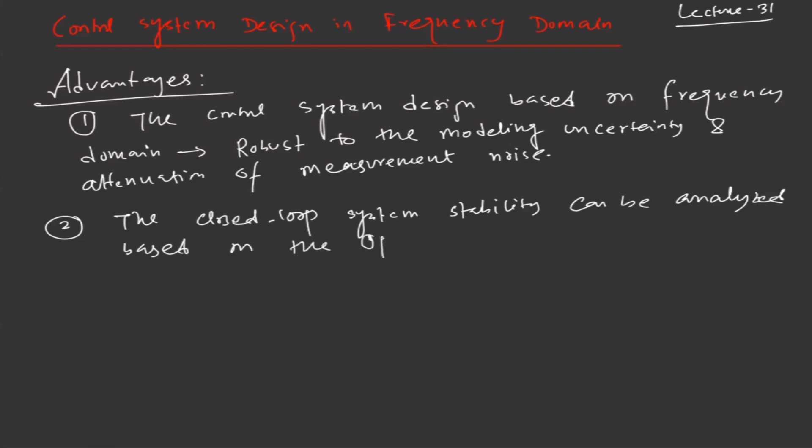So the control system based on frequency domain analysis can deal with modeling uncertainty and measurement noise. Second advantage: the closed loop system stability can be analyzed based on the open loop frequency response.

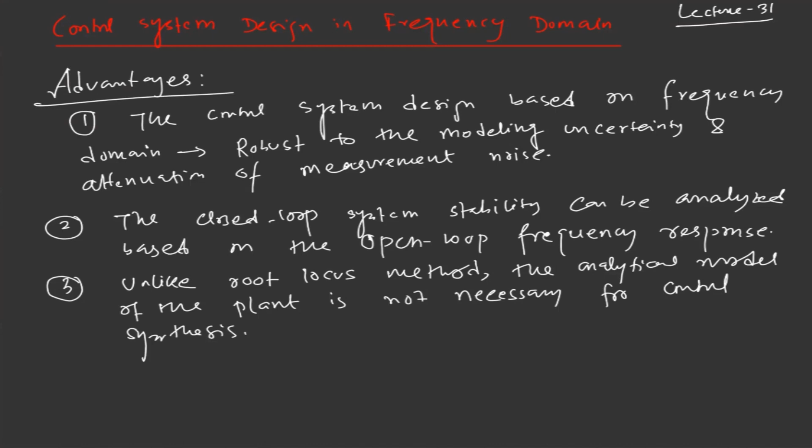Third point is, unlike the root locus method, the analytical model of the plant is not necessary for control synthesis. If you notice in the previous lectures, to design the PID control, the analytical model of the plant needs to be known. But in the frequency domain, it is not necessary.

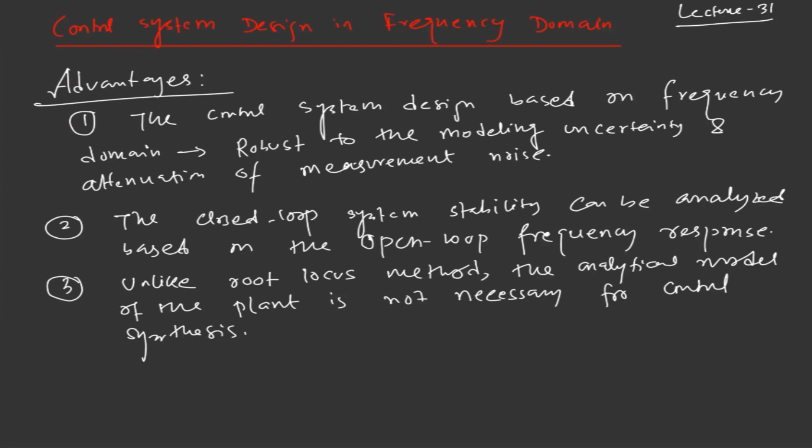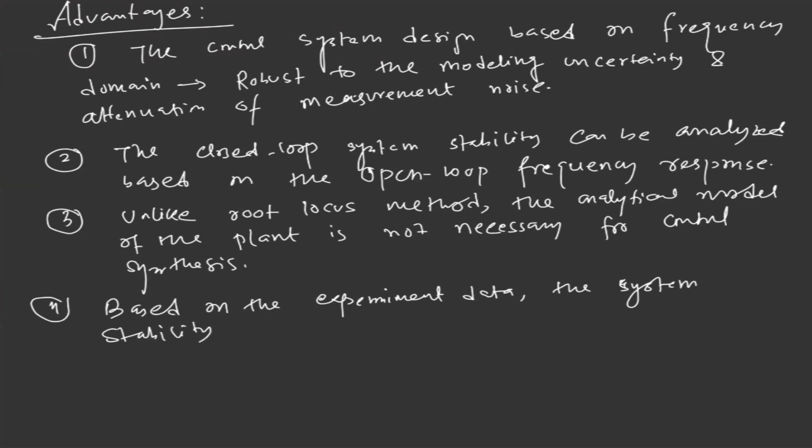Based on the experimental data or frequency response of the system, we can come up with the control system design. So we can write: based on experimental data, system stability can be analyzed.

And also, why this is important: because in most cases, the suppliers may not provide the detailed analytical model of the system. They only provide the data, and from the given data, we can come up with the control system analysis.

So for aircraft attitude control, suppliers may not provide a detailed analytical model of the different subsystems for designing the control system. This kind of problem can be dealt with in frequency domain analysis. Even when the analytical model is not available to us, we can come up with the control system stability.

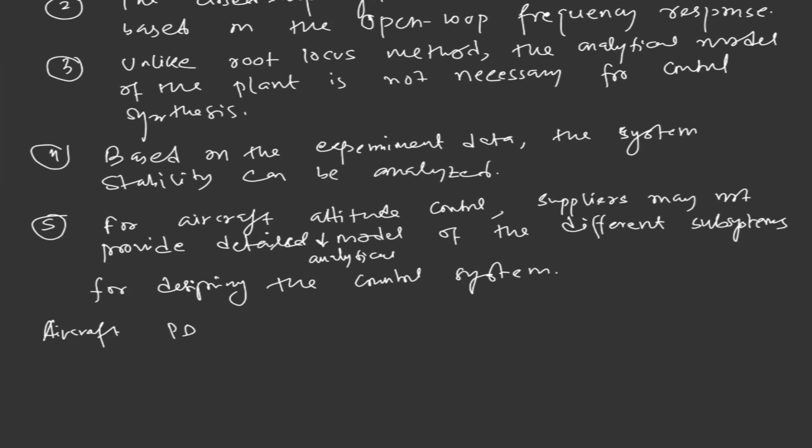So these are the few advantages in frequency domain analysis. Now let's go back to our aircraft PD control system, the aircraft PD controlled attitude problem. Here we'll come up with some relations, how we can derive some quality conditions based on the frequency domain measurements as well as time domain analysis, and based on these relations, we can come up with the control system design. So first, let's go with the PD control system for the aircraft attitude control problem.

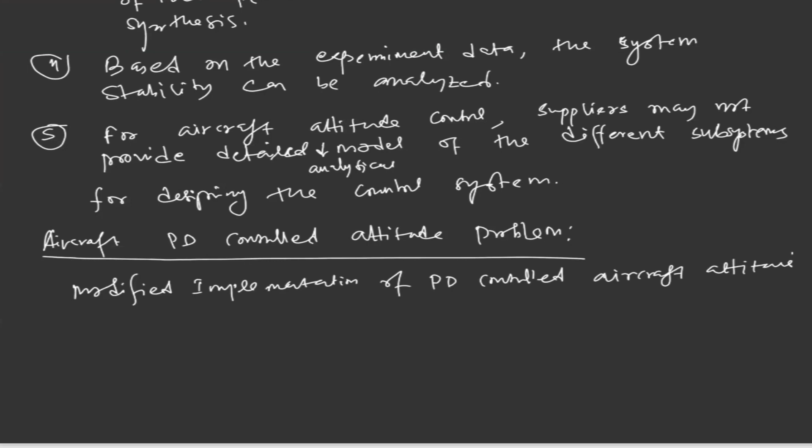So there are two different models we have discussed, if you remember. One was the modified implementation of the PD controlled aircraft attitude problem.

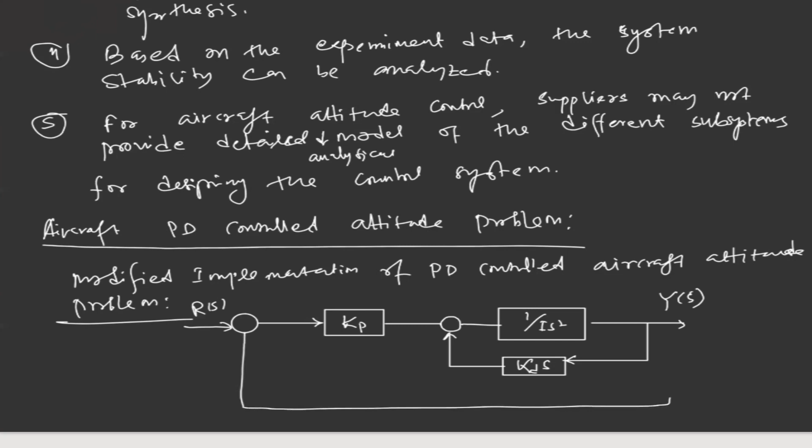So the block diagram we had, in the forward path we had KP, and here we have another summing point, and this is our plant, which is 1 upon IS square, and in the feedback we had KD S, this is our output which was generated by YS. This is the feedback, and we have a summing point which basically connects the negative feedback, and this is our reference signal R to be tracked, and this is the negative feedback. This is actually the modified implementation of the PD control system of the aircraft attitude problem.

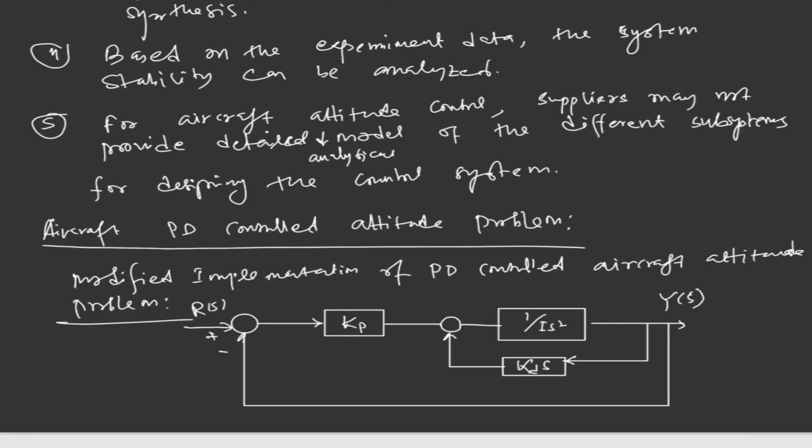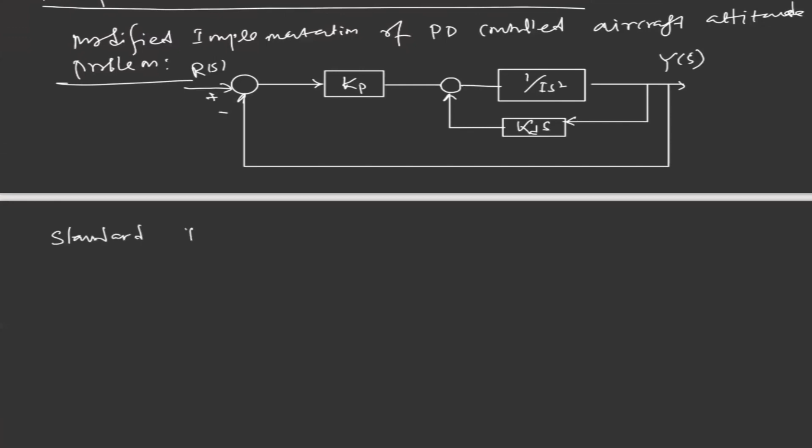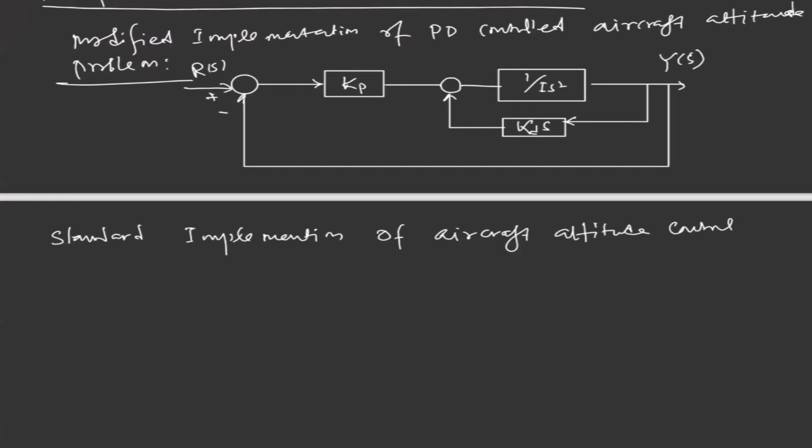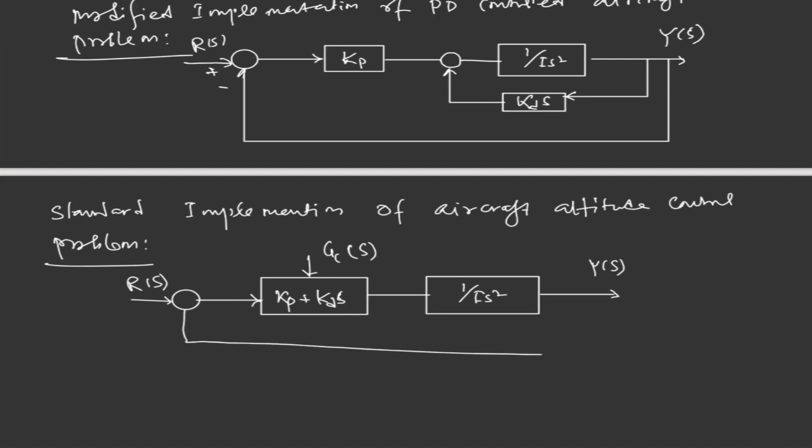And we have the standard implementation as well. If you look at the PD control system, the standard implementation of the aircraft attitude control problem, their block diagram was: this is our PD controller, KP plus KDS, this is basically GC of S, the controller transfer function. And we have the plant, which is 1 upon I S squared, and this is our output Y of S. And this is the summing point which connects the closed loop path. This is R of S to be tracked, and this is our negative feedback.

This is the modified implementation of the aircraft attitude control. We'll take this block diagram to come up with the relation between the frequency domain analysis and time domain analysis. So based on the time domain parameters, we can come up with conclusions on the frequency domain part, and if you have frequency domain specifications, we can come up with the time domain specification. This is a very important relation that we are going to have now.

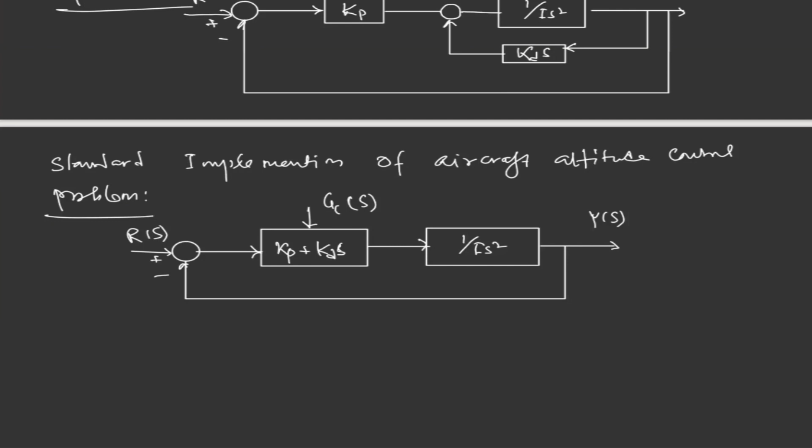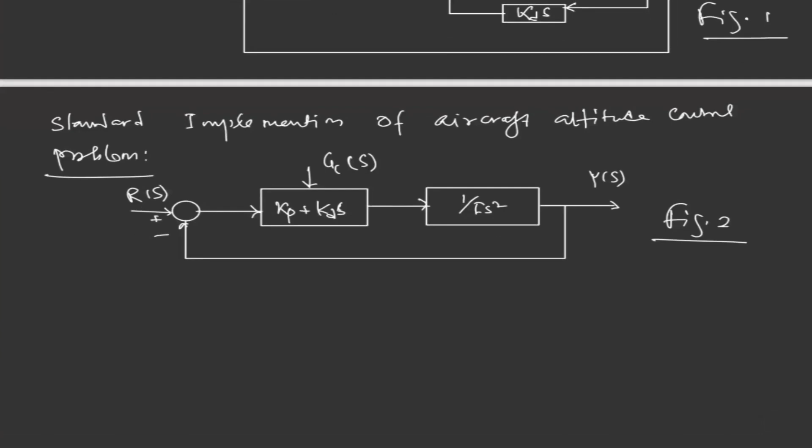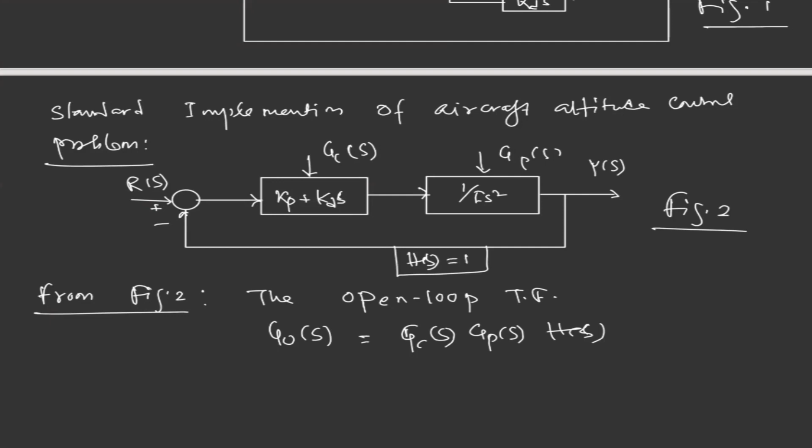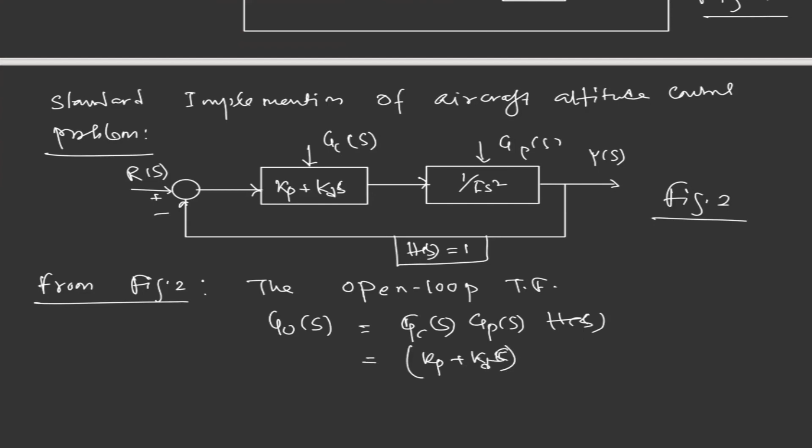Let me define this figure number 1, and this is figure number 2. From figure number 2, the open loop transfer function, we can write G naught of S equal to GC of S, GP of S, H of S. So this is our plant GP of S, and we have feedback H of S equal to 1, this is basically unity feedback. So we can write GC of S as KP plus KDS, and GP is basically 1 upon I S square, H is 1, or we can write KP plus KDS divided by I S square.

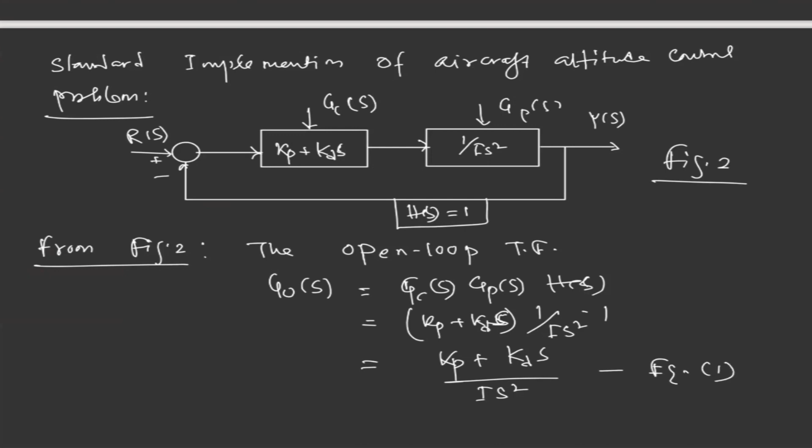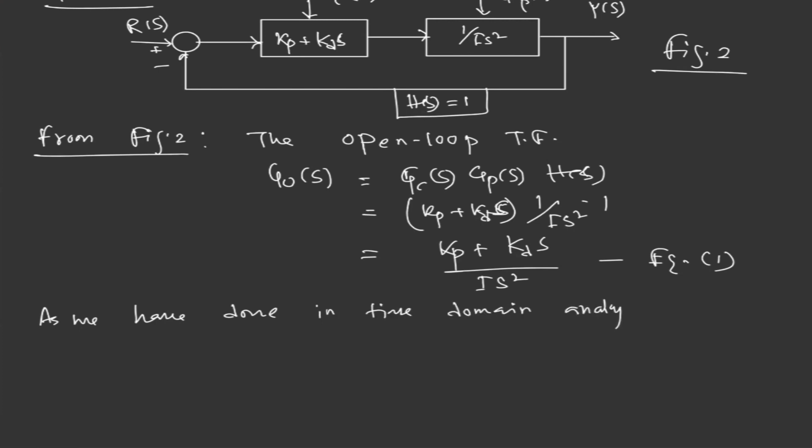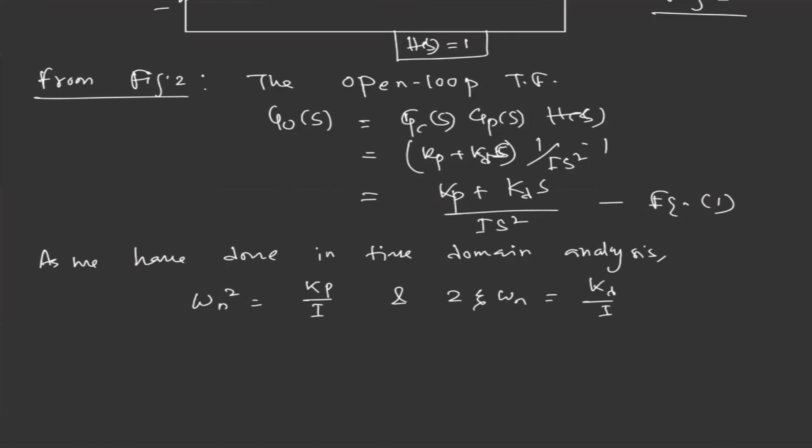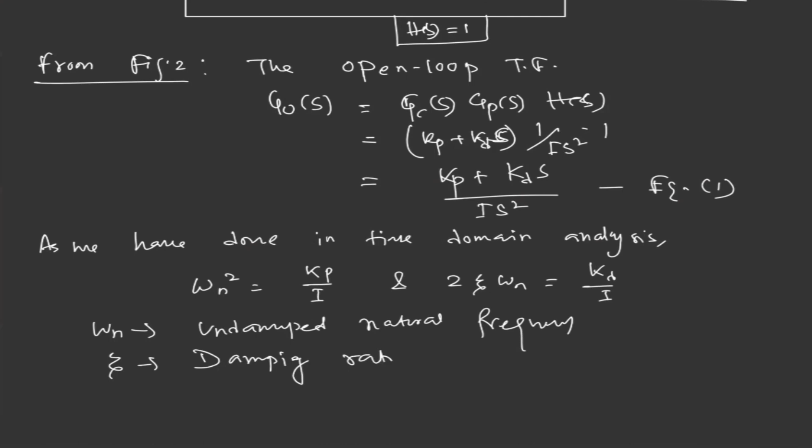Let me define this equation number 1. As we have done before in time domain analysis, we had two important relations between the damping ratio and natural frequency and the controller gains. If you remember, omega n squared equal to KP by I, and 2 zeta omega n equal to KD by I. Here omega n is basically the undamped natural frequency of the system, and zeta is the damping ratio, and these parameters Kp and Kd are the controller gains.

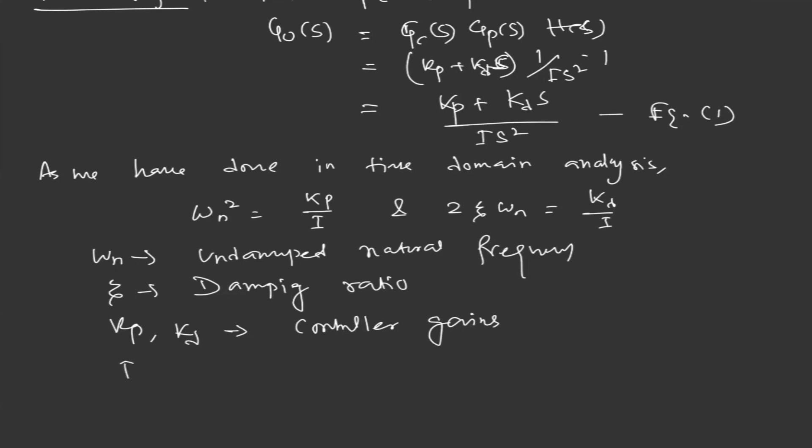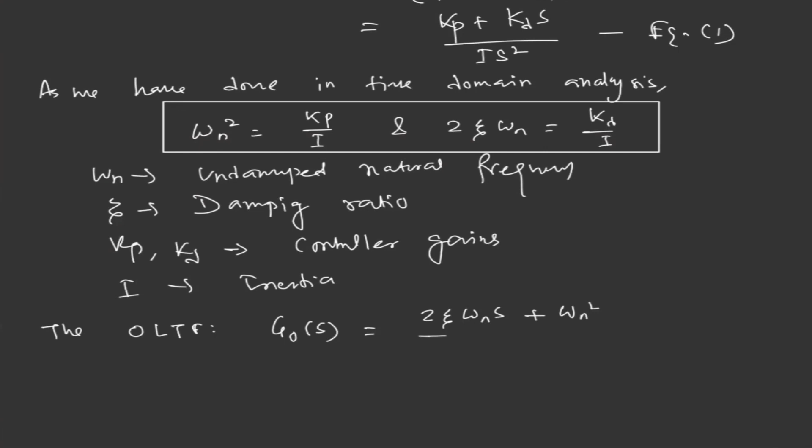I is basically the inertia of the aircraft. Now, to substitute these relations in equation number 1, the open loop transfer function, OLTF, yields G naught of S equal to 2 zeta omega n S plus omega n square, divided by S square. Now this is basically in time domain, we can say.

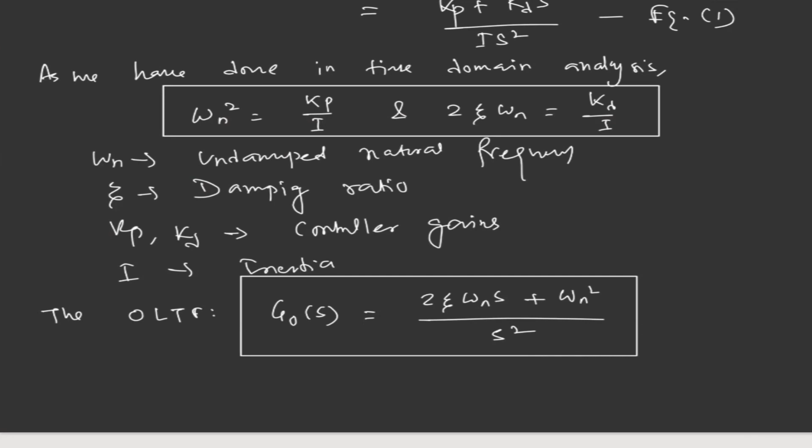Now we'll come up with the frequency domain analysis. We'd like to start how we can come up with the relation between the frequency domain specification and time domain specification. So to carry out the formulation in frequency domain, we'll substitute in place of S, J omega, in the open loop transfer function. This is equation number 2, let me write.

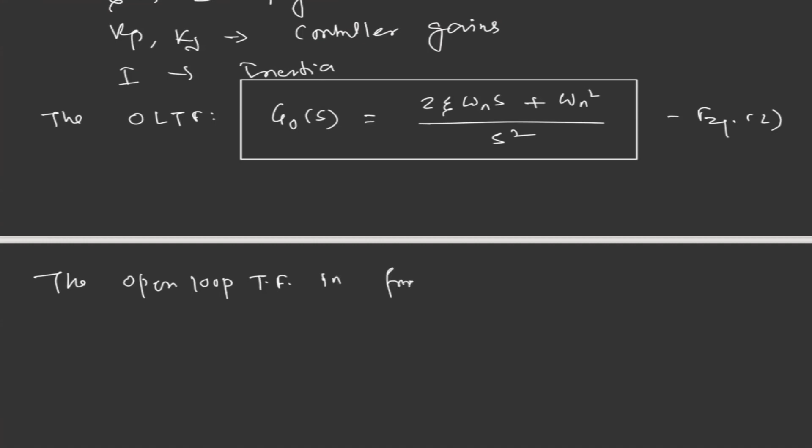The open loop transfer function in frequency domain, we can write G naught of S equal to J omega, equal to 2 zeta omega n J omega plus omega n square, divided by omega square minus... and if you further simplify this equation, it will be omega n by omega squared, minus j 2 zeta omega n by omega. Let's note this as equation number 3.

And now if you come up with the magnitude of this open loop transfer function, you can write this basically as the gain of this transfer function. Open loop gain in frequency domain, we can write magnitude of J omega equal to the square root of the real part squared: omega n by omega to the 4th, plus 4 zeta squared, omega n by omega squared. Let me denote this equation number 4. This is how it comes: if you have some function, for example, x equal to a plus ib, the magnitude of x we can write as root over a square plus b square. This is a very fundamental thing.

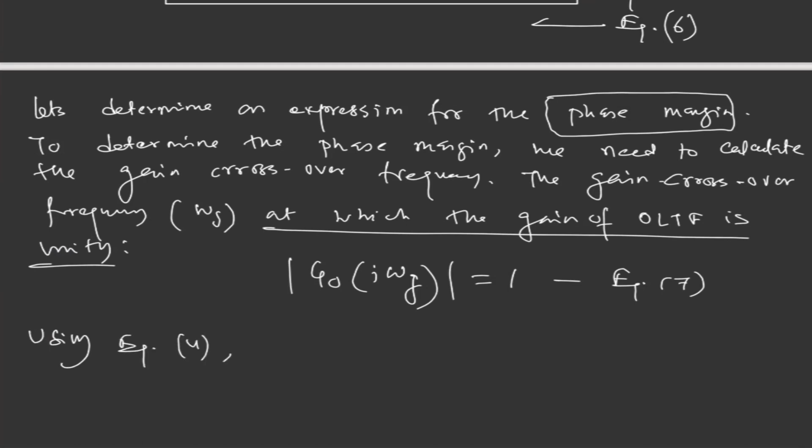And using equation number 4, so total gain already you have found of a system. This is the gain of the system, equation number 4. And at gain crossover frequency, equation number 4 can be written as

omega n by omega g. Instead of omega, we are writing omega g. This is the gain crossover frequency. whole to the power 4 plus 4 zeta squared omega n divided by omega g square

whole root equal to 1. And after simplifying, this is omega n by omega g, we have 4 plus 4 zeta square omega n by omega g square equal to 1. So we have to solve this equation.

Let's consider some parameter q, which is denoted by omega n by omega g square. And let's denote this equation number 8.

Substituting q in equation 8, we form the quadratic equation, which is q square plus 4 zeta square q minus 1 equal to 0.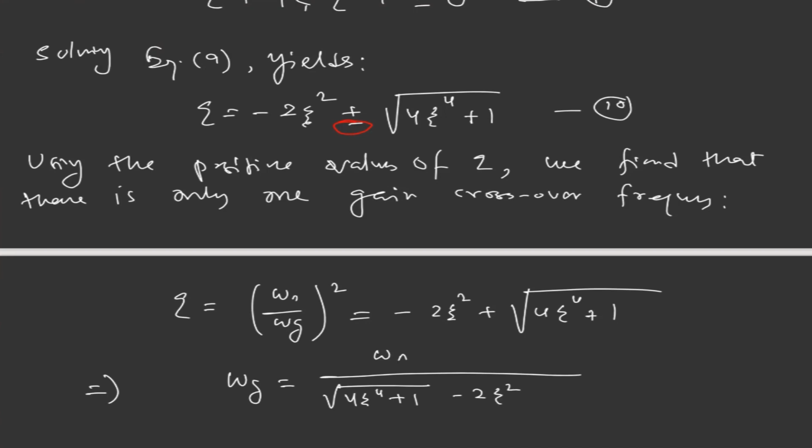From this, since we are assuming the positive value of omega g, omega g can be written as omega n root over 4 zeta to the 4 plus 1 minus 2 zeta square, root. This is a very important value which relates the natural frequency and gain crossover frequency. It relates between omega g, omega n, and the damping ratio of the system.

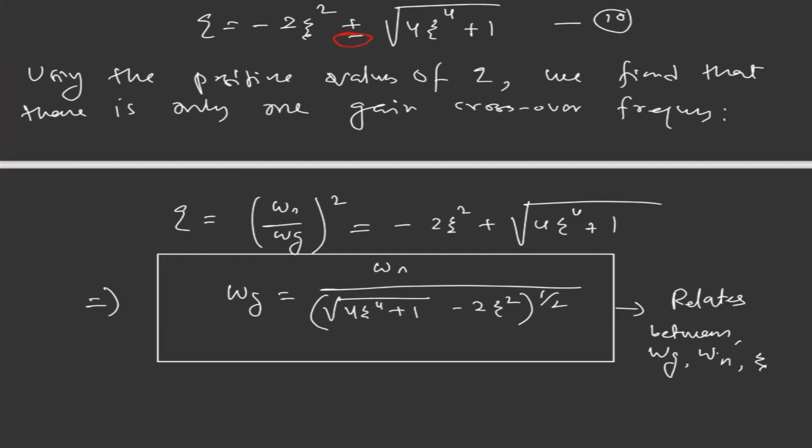From this relation, we'll come up with the time domain specification relation, and we can connect frequency domain specification and time domain specification. Then we'll discuss how we can design the control system given the time domain specification, and how we can come up with the frequency domain control specification.

Now we would like to find the phase margin of the open loop transfer function. If you refer to equation number 6, given by this expression, it is clear that the phase margin is positive and given by: phase margin equal to 180 degree plus total phase at gain crossover frequency. Let's denote this equation number 12. This is very important to find the phase margin of the system, this is the formula we use.

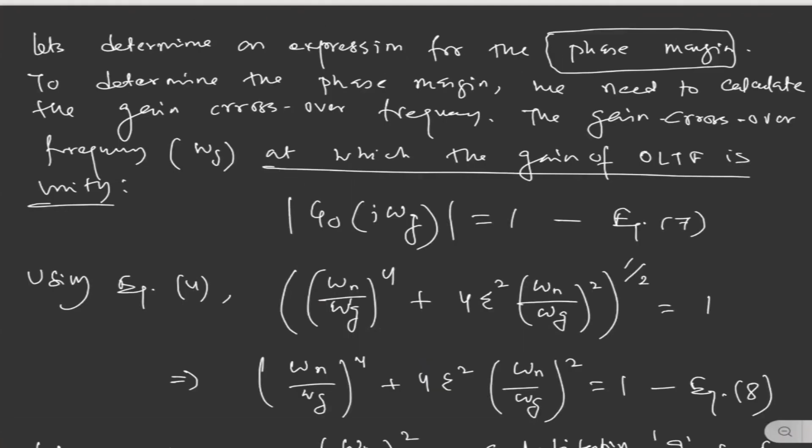Now substituting equation 11 and equation 5 into equation 12 yields: phase margin equal to 180 degree plus G naught j omega g. So we'll find the phase of G naught at the gain crossover frequency using equation 5, by this expression. If you substitute that expression here, you get 180 degree plus tan inverse of 2 zeta omega g by omega n minus 180 degree. Now if you substitute the value of omega g from equation number 11 into this equation, we get tan inverse...

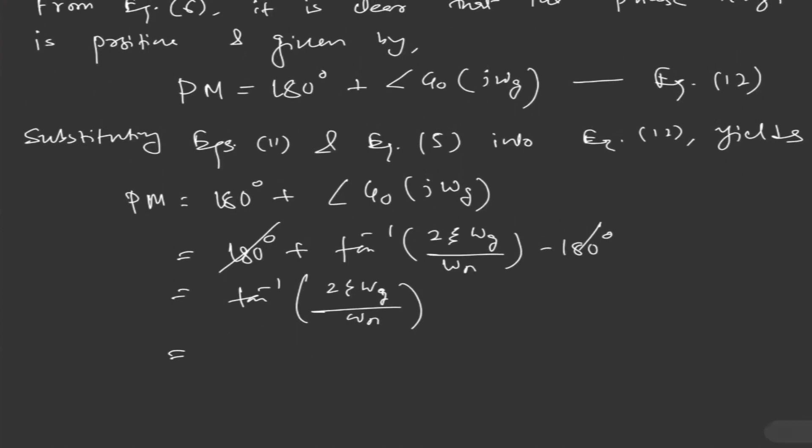Let me cancel this term. So tan inverse, let me write 2 zeta omega g divided by omega n. Now if you substitute the expression of omega g in this expression, it yields 2 zeta over 4 zeta to the 4 plus 1 minus 2 zeta square to the power half. So this is the expression we are getting. Now, if you notice this expression, let's denote this equation number 13.

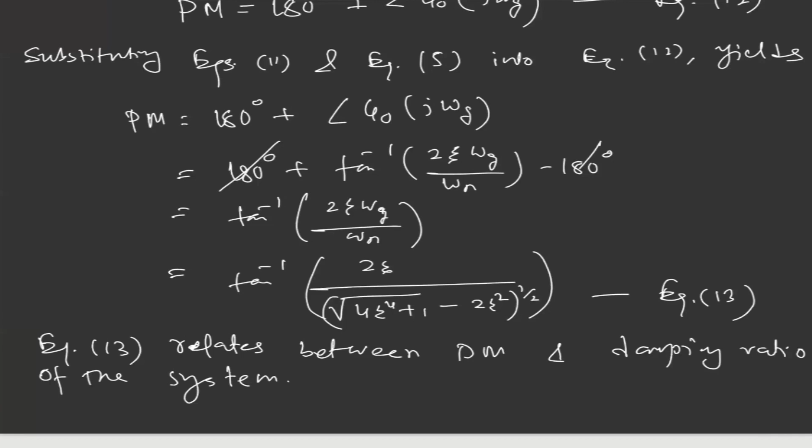This equation number 13 relates between phase margin and damping ratio of the system. This is a very important equation. So here, for a given damping ratio, we can find the phase margin of the system.

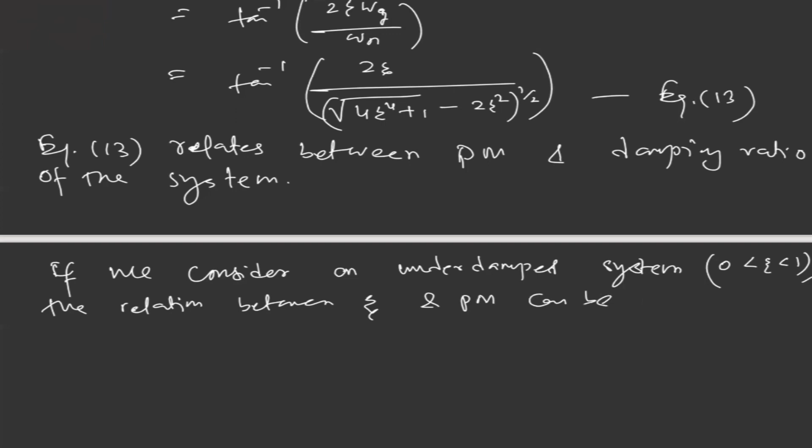If we consider an underdamped system where the damping ratio varies between 0 to 1, the relation between damping ratio and phase margin can be plotted for this damping ratio range. So we are having the response plot.

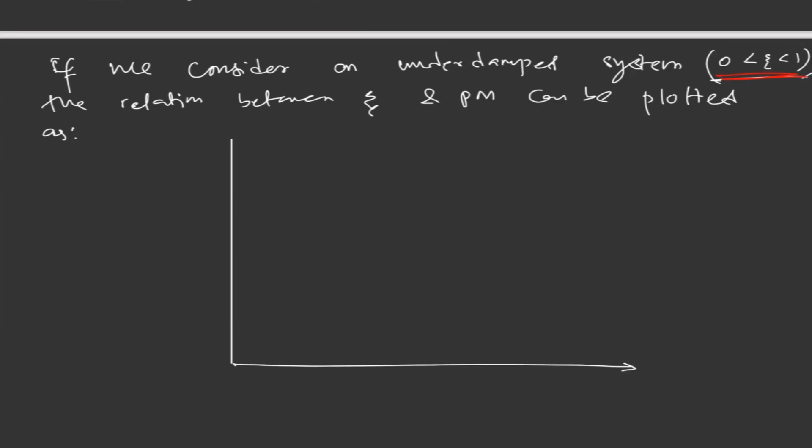This is the phase margin in degree, and this is the damping ratio. Let me consider this as 0.2, 0.4, 0.6, and 1. And if we break this y-axis like this, it's 10, 20, 30, 40, 50, 60, 70, 80, 90. So this is the phase margin where the values are in degrees, and we can come up with some relation.

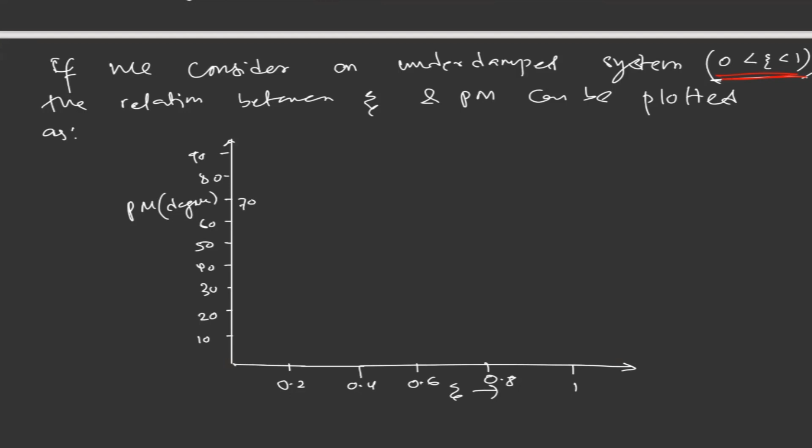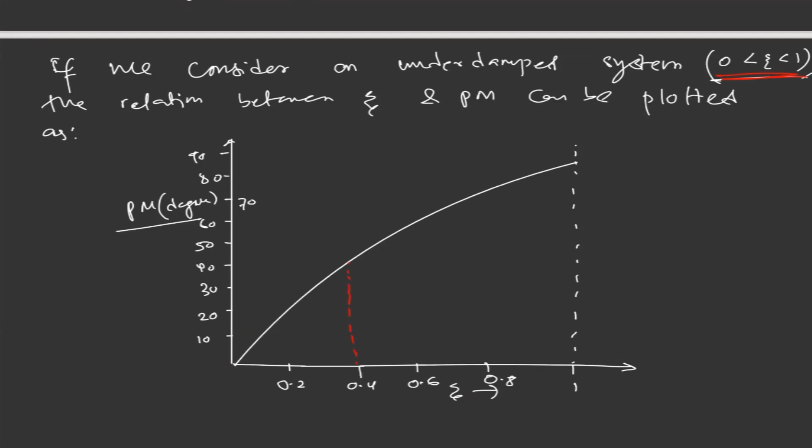It should be something like this. So it means for a given damping ratio, we can find the phase margin. Suppose the damping ratio is given as 0.4, so at 0.4 we can come up with what should be the value of phase margin. We can get those values. So this is a very important relation between the phase margin and damping ratio.

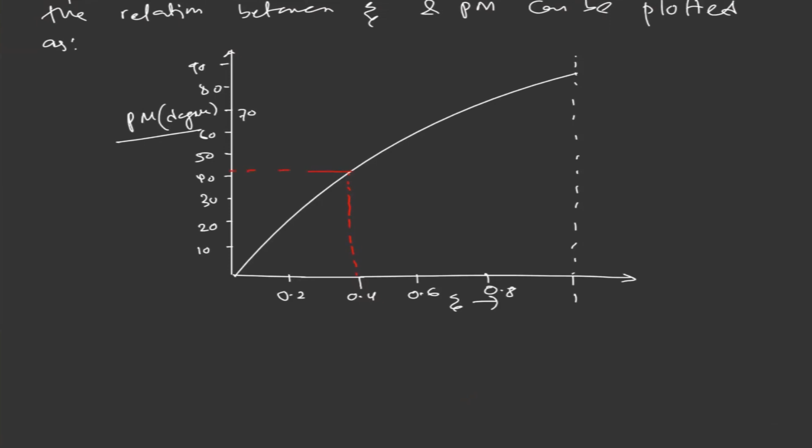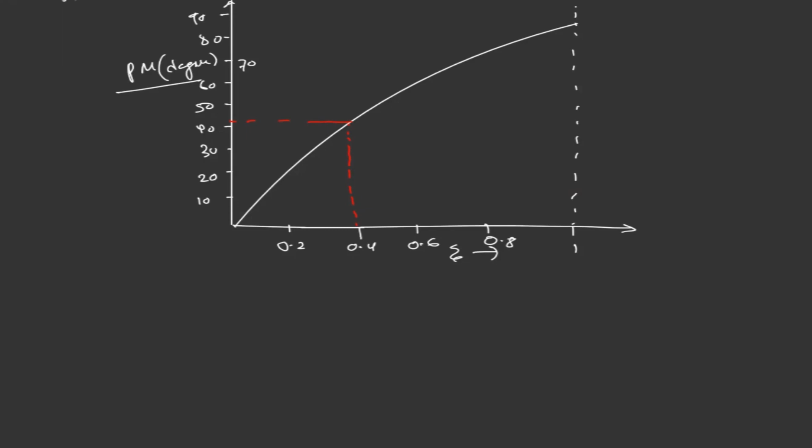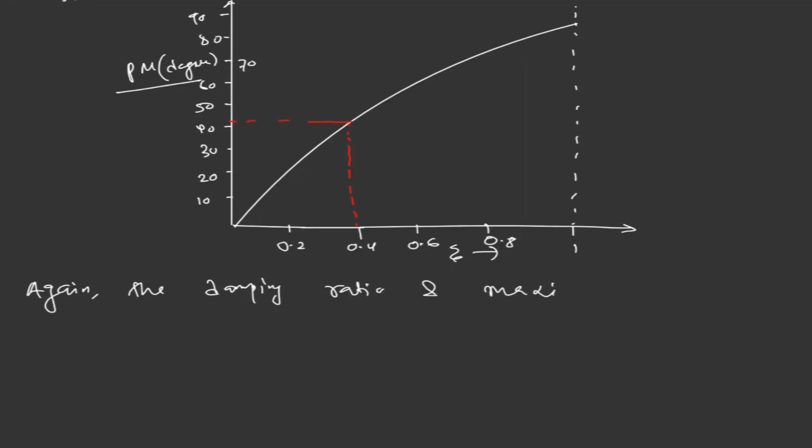Now we'll see how the damping ratio relates to maximum overshoot, and also the phase margin and damping ratio. Again, the damping ratio and maximum overshoot are related by MP, the maximum overshoot, equal to e to the power minus pi zeta over root of 1 minus zeta square, into 100%.

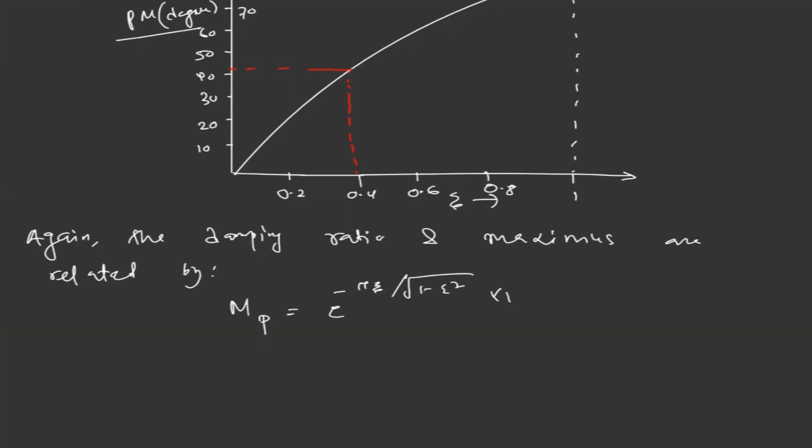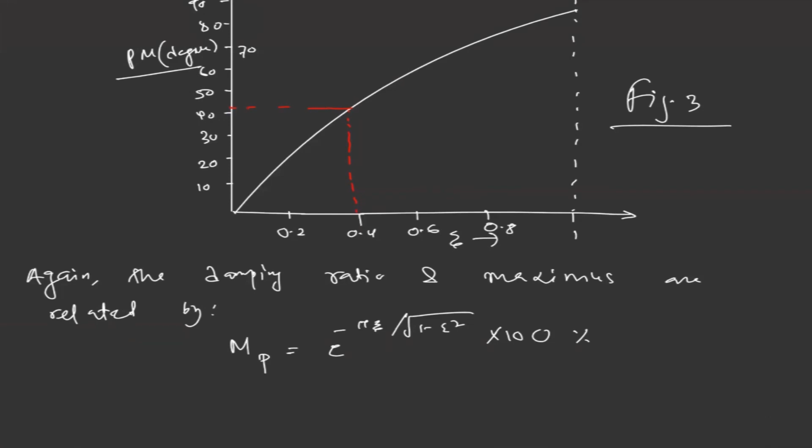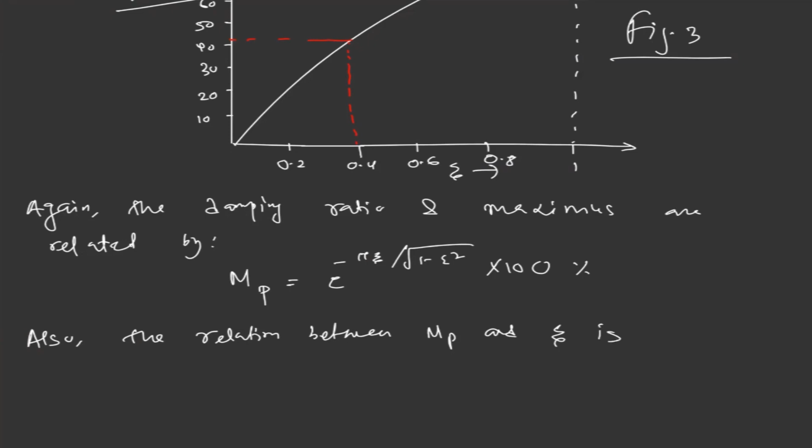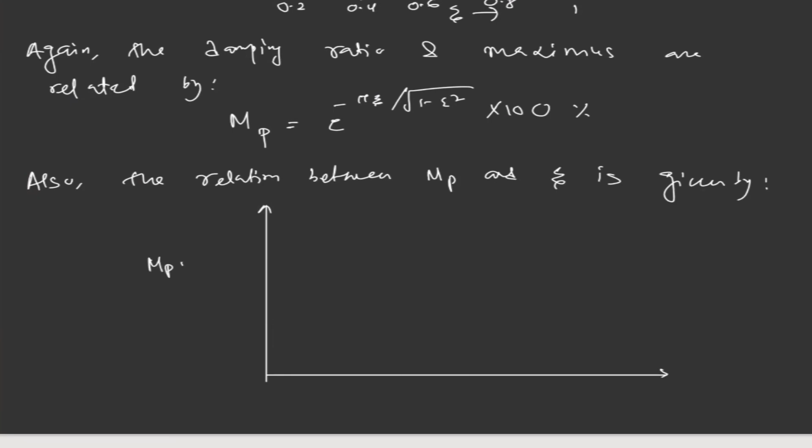In figure 3, we relate the phase margin and damping ratio, and also come up with the relation between phase margin and maximum overshoot. Here, on the y-axis we are plotting the maximum overshoot in percentage, and on the x-axis the phase margin in degrees.

If you plot this, the x-axis goes 10, 20, 30, 40, 50, 60, 70, 80 degrees, and the y-axis goes 10, 20, 30, 40, 50, 60, 70, 80, 90, 100. The relation between phase margin and damping ratio, the plot looks something like this.

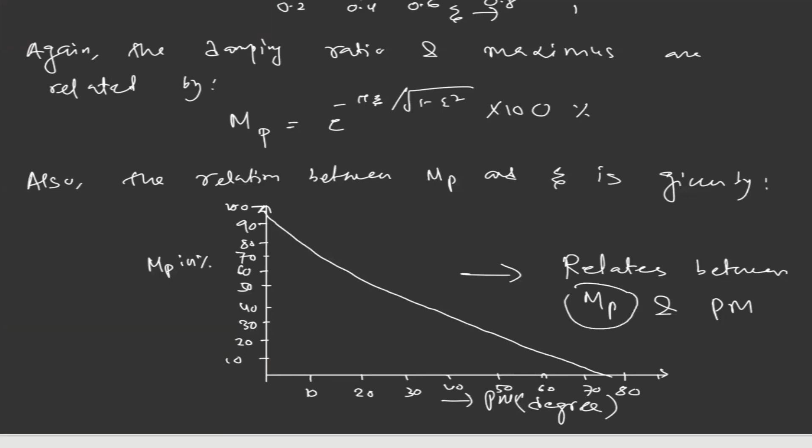This relates MP and phase margin. So for example, if the maximum overshoot is given to us, from this plot we can find the phase margin of the system. This is how we relate time domain specification and frequency domain specification.

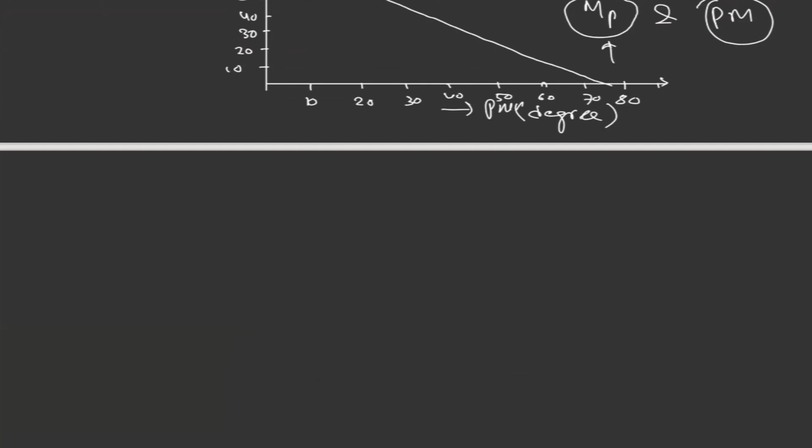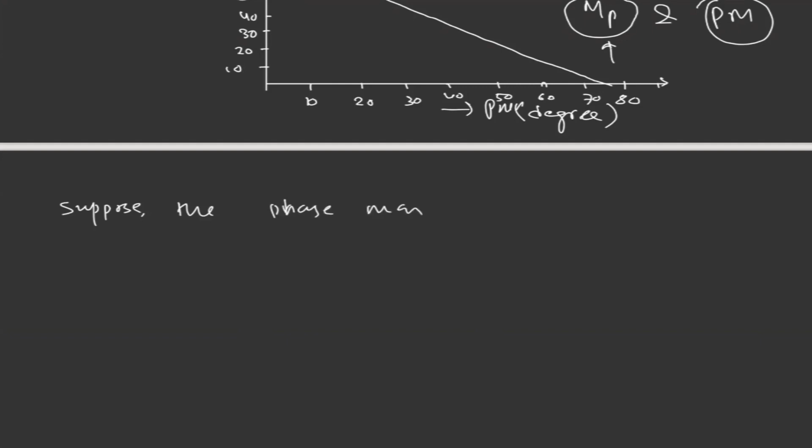Now we have another relation, where rise time and settling time connect with gain crossover frequency. Suppose the phase margin has been specified or given to us. For the given phase margin, from this plot we can find the damping ratio.

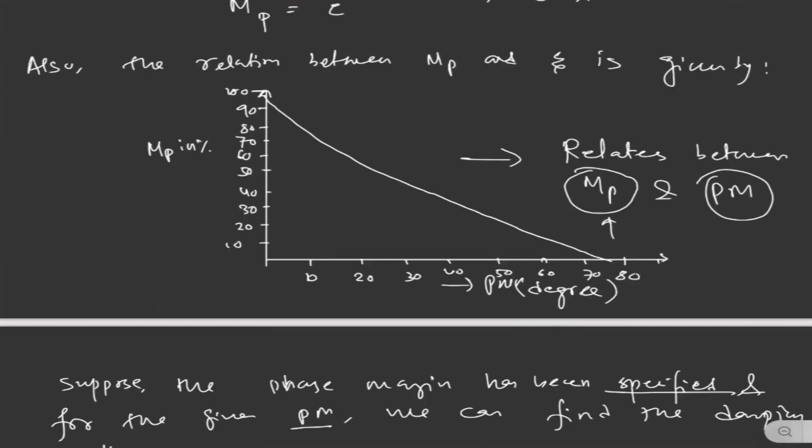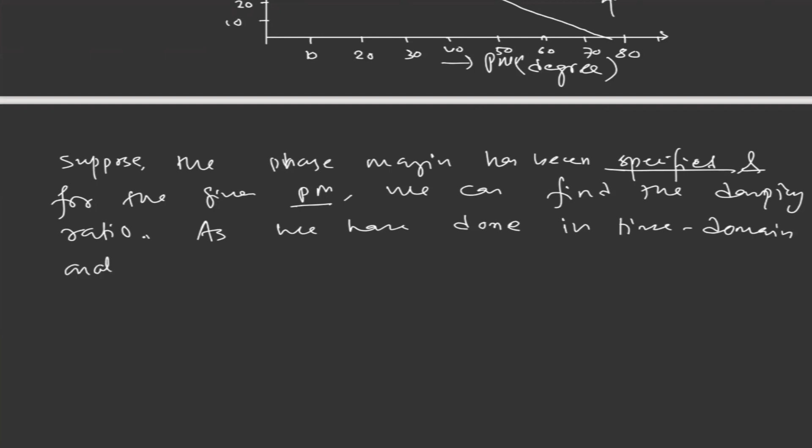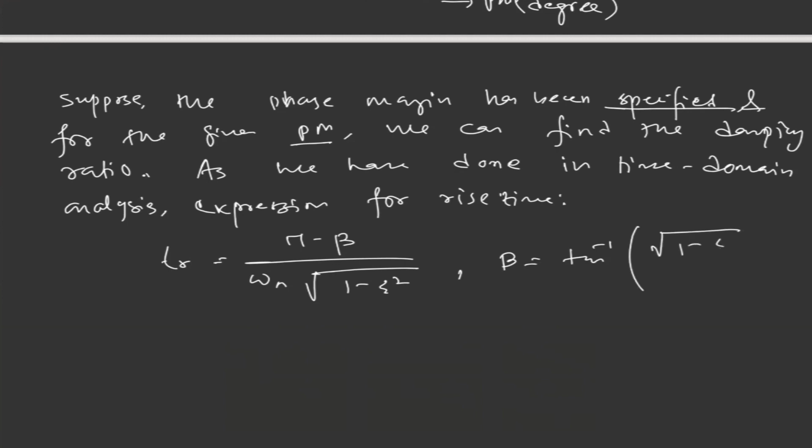Now let's see how gain crossover frequency and settling time, or rise time, are connected. Let's start with rise time. As we have done in time domain analysis, the expression for rise time is TR equal to pi minus beta divided by omega n times root of 1 minus zeta square, where beta equals tan inverse of root 1 minus zeta square by zeta.

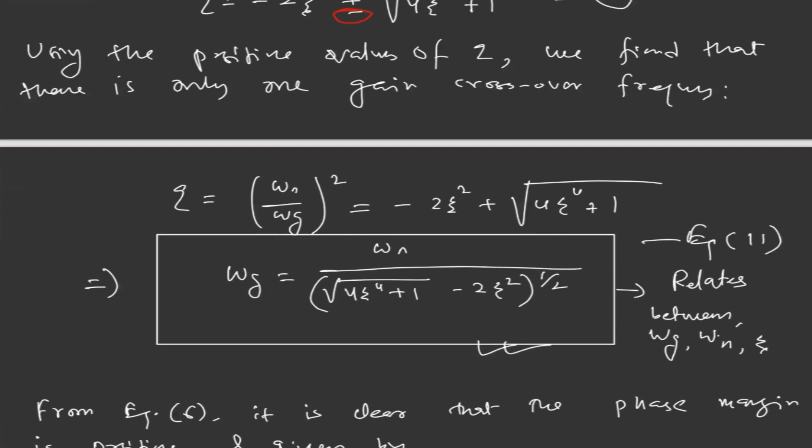Now if you use this equation, equation 11, here, we can find the relation between rise time and gain crossover frequency. Basically we substitute omega n, because from equation 11 we can get the expression for omega n, and substitute it here to find the relation between TR and omega g.

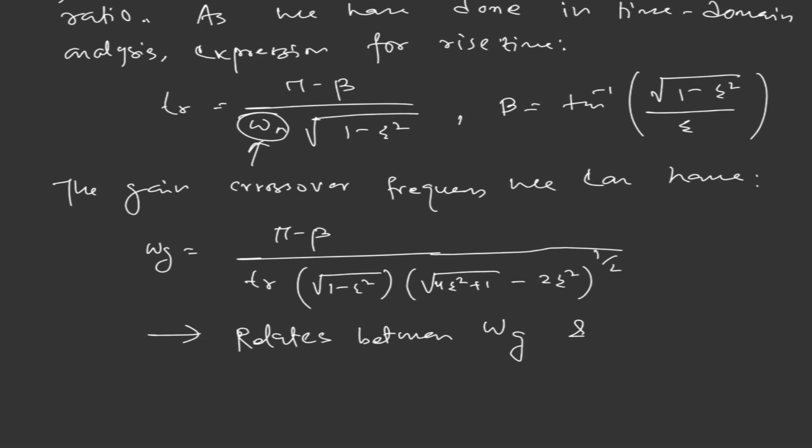So we can write the gain crossover frequency, omega g, equal to pi minus beta divided by TR times root of 1 minus zeta square, times root of 4 zeta to the fourth plus 1 minus 2 zeta square. This is how we relate gain crossover frequency and rise time.

Now we'll look at the settling time constant. Also from time domain analysis, the expression for settling time is Ts equal to natural logarithm of 0.02 times root of 1 minus zeta square, divided by zeta omega n.

Again, if we substitute the value of omega n from equation 11, we can find the relation between Ts, settling time, and gain crossover frequency. We get omega g equal to natural logarithm of 0.02 times root of 1 minus zeta square, divided by zeta Ts, times root of 4 zeta to the fourth plus 1 minus 2 zeta square. This is how we connect the time domain specification with gain crossover frequency.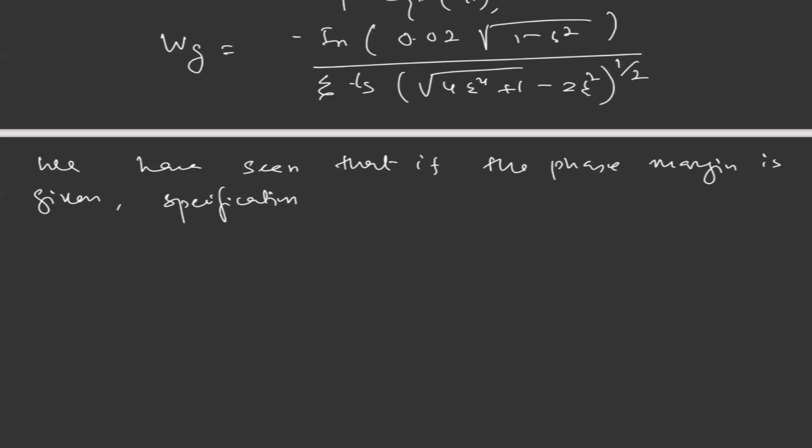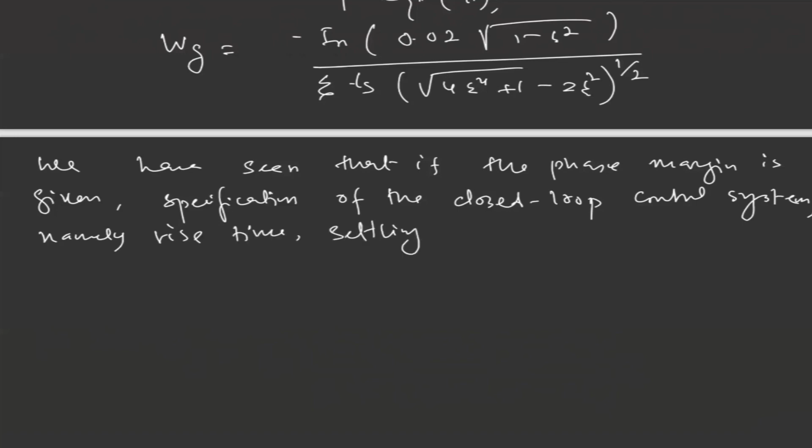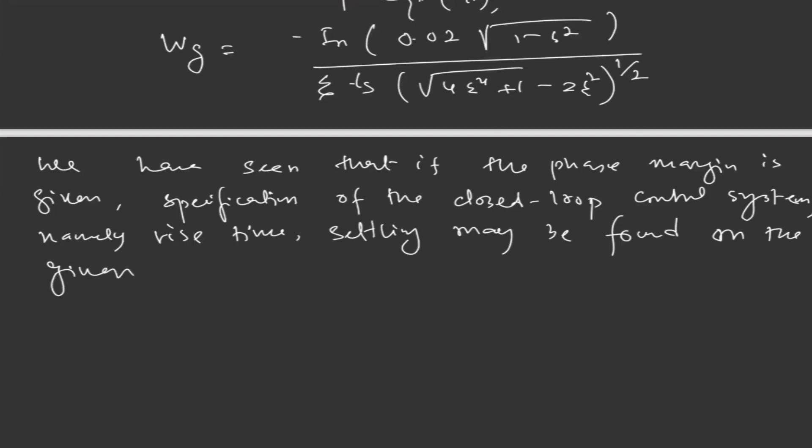So the conclusion of this lecture is that we have seen how, if the phase margin specification of the closed loop control system is given, we can find the time domain specifications, namely rise time and settling time, based on the given gain crossover frequency. This is a very important part, how we connect frequency domain analysis, done on the open loop transfer function, with the time domain system specifications of the closed loop control system.